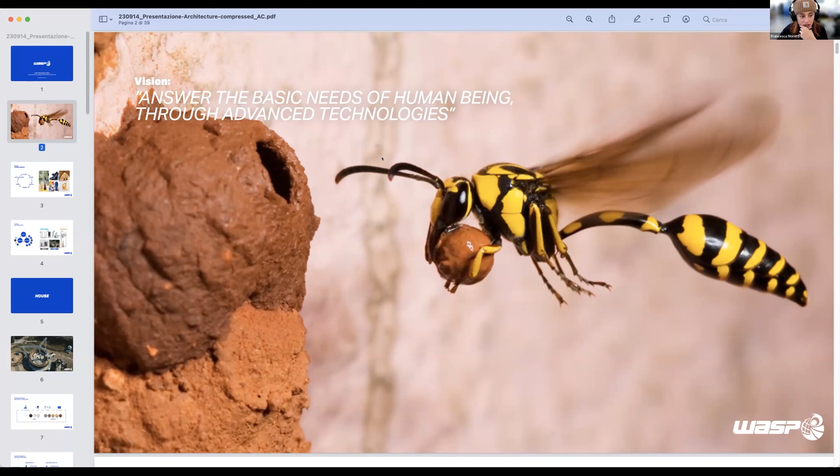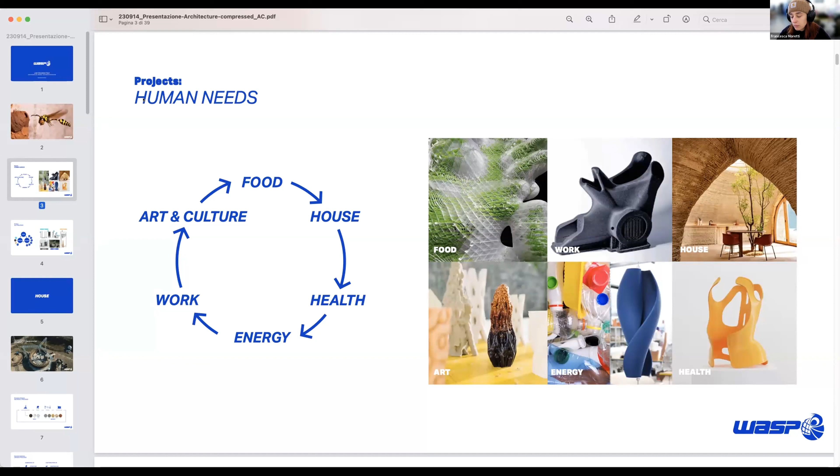We were really fascinated by the chance to connect additive manufacturing and real results that can work on human needs, like food, energy, art, house, or medical devices in general. We are designers, so we created machinery that can help us go in that direction.

In this presentation I will focus on clay and the house printer we created. This is the first case study we did, about 5 years ago. In the beginning our work was creating the machine that didn't exist before, and now we are facing the architectural topics.

So here is the first case where you can see the process: we took the earth directly from the ground, then we put it in the mixer - really common machinery in Italy - where we combine husk, raw fiber in general, clay, and sand together, and then put it into the pumping system to create a wall with already prepared insulation, empty space.

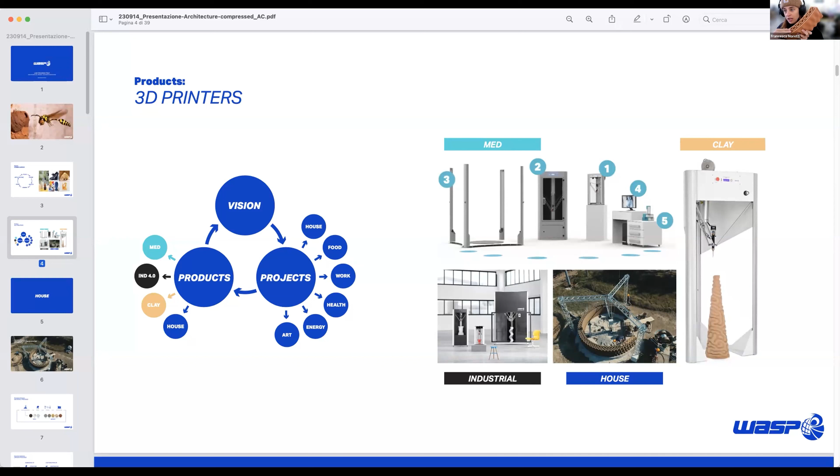We create with a smaller machine as a project in scale. So we usually work in a small scale, and then we scale up till the building size. This also helps a lot to understand the problems we can have scaling up the project.

In Gaia, we use local raw material like soil, but you can also put inside lime or cement and aggregates.

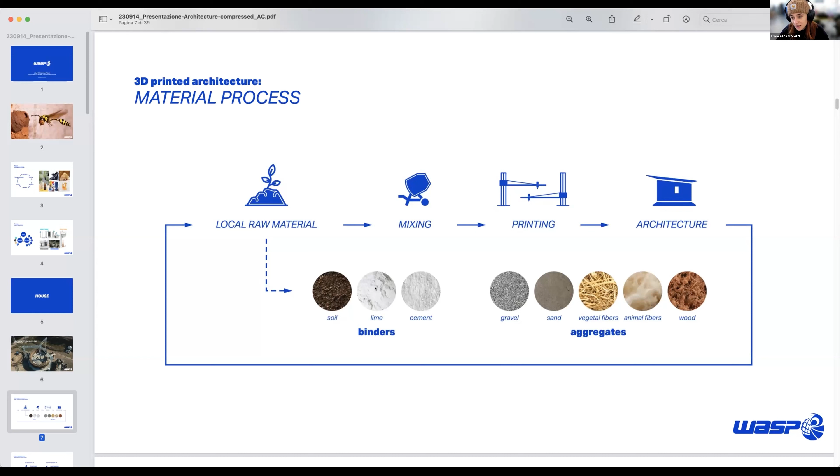The WASP project wants to put on the market structural walls in raw earth, but we have to manage with a different legal phase also here in Italy. So we are open to understanding how to do it properly, because it's a new application.

You can see online a lot of 3D printing in concrete, which is also a new way to construct, but we want to push the limit a bit further and work on natural materials.

So what we have in this wall is a chance to create insulation, also including the system.

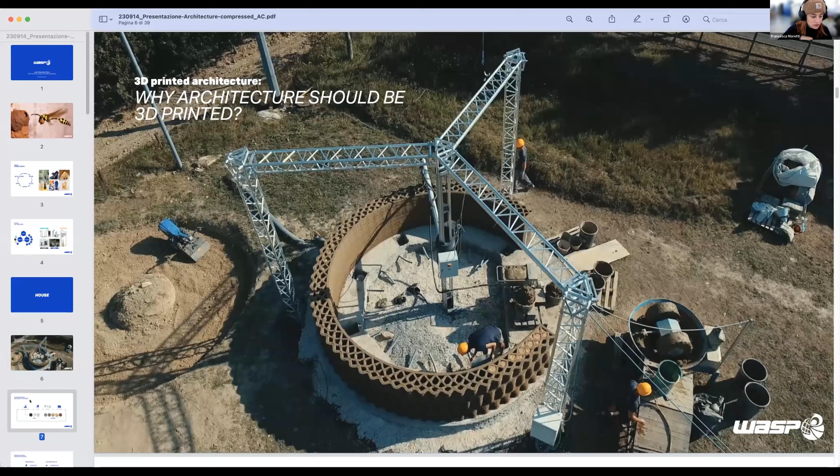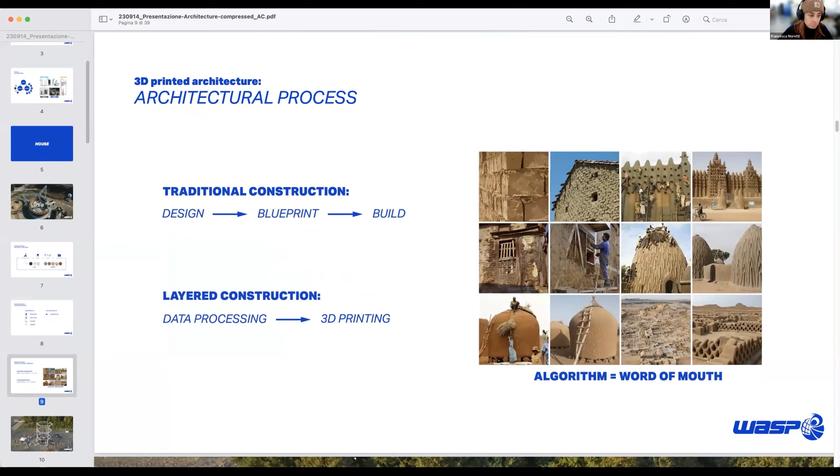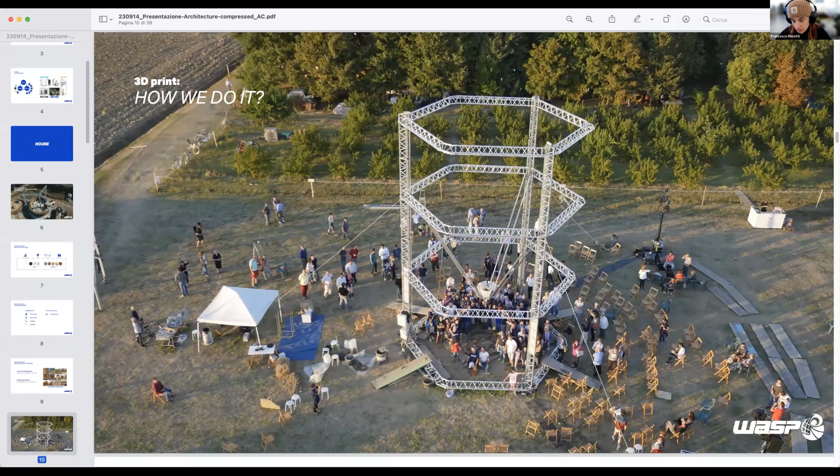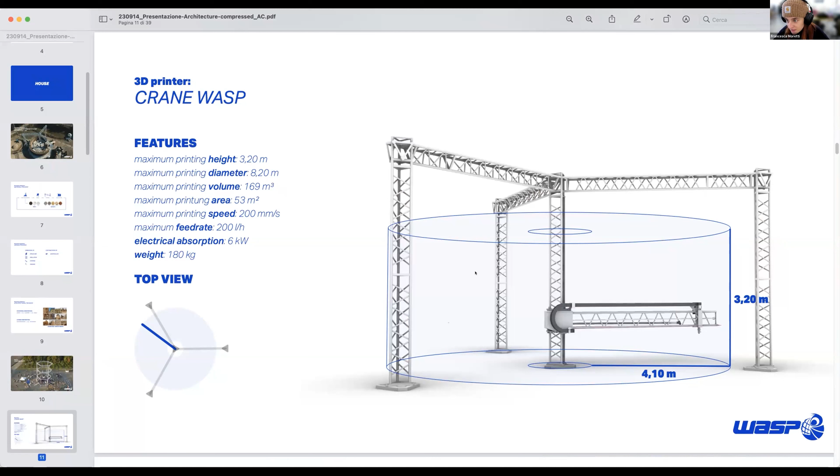This is the first printer we did in the past, which was one of the biggest in the world at that time. And now we have the Crane WASP with its optimized printer, with the biggest surface area for printing instead of this one. You have to imagine that at that time there was no previous experience in this technology.

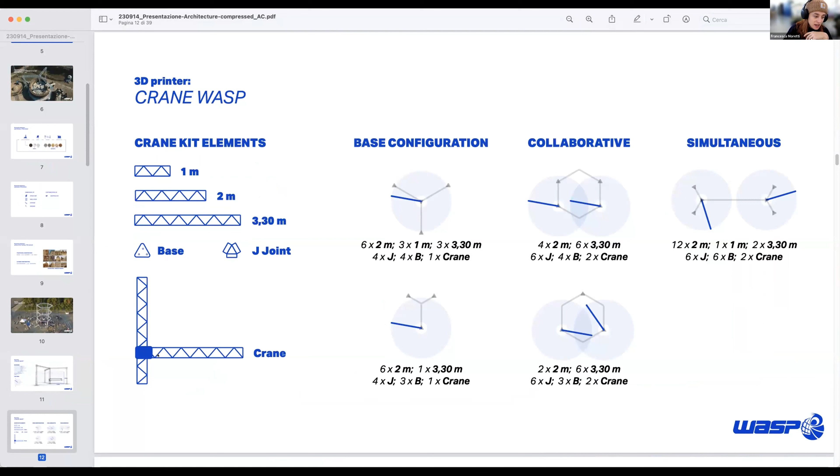And with this easy machine, we are creating a different setup. This machine can be mounted and disassembled with 3 people, and it's not heavy, so it's easy to move, because we were thinking to go also to places where it's not so easy to construct in a traditional way. So this could be the setup for us at the building site.

Where you can find the machinery, the earth taken by the place or already premixed raw earth, and all these steps that create the mixture to use with the printer.

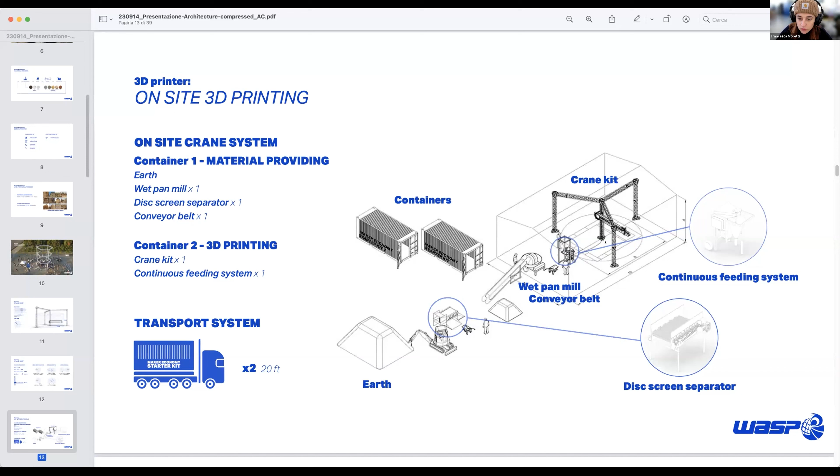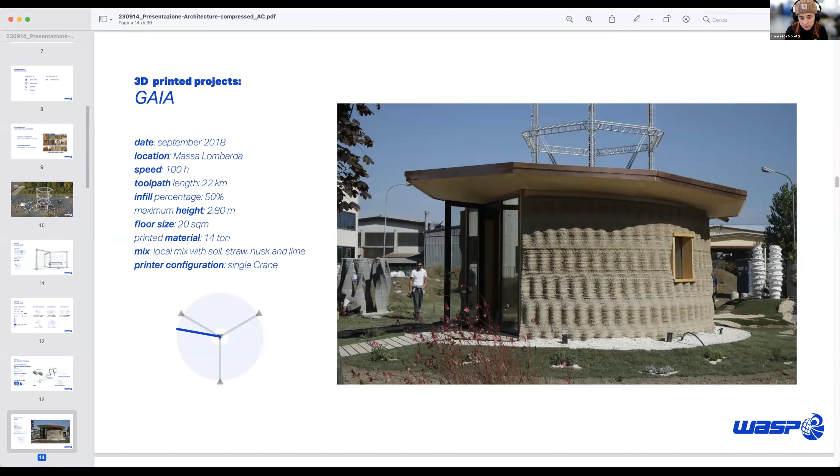This is our first case study at our headquarters. The name is Gaia, and it was the result of the previous building site I shared with you.

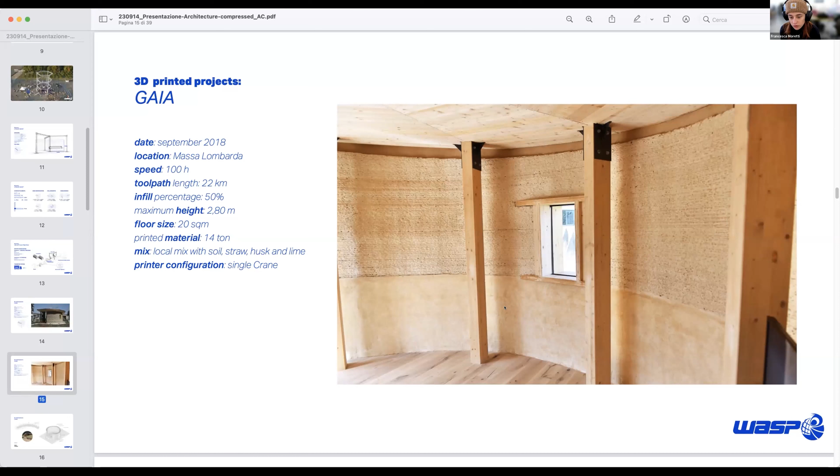This is the interior of Gaia, where we have the structural structure, and on this wood part we manually worked on the layer, also to show that you can cover, decorate, or add something on it.

We really spent a lot of time thinking about insulation, where we can use the empty space of the wall in the correct way, or what we can do with this technology. You have to imagine that we are mostly designers and engineers, not architects. So we faced in the past how this technology can put something new or different on the market or in the research.

So we put inside husk of rice for insulation, and the partner for this project was Rice House at that time.

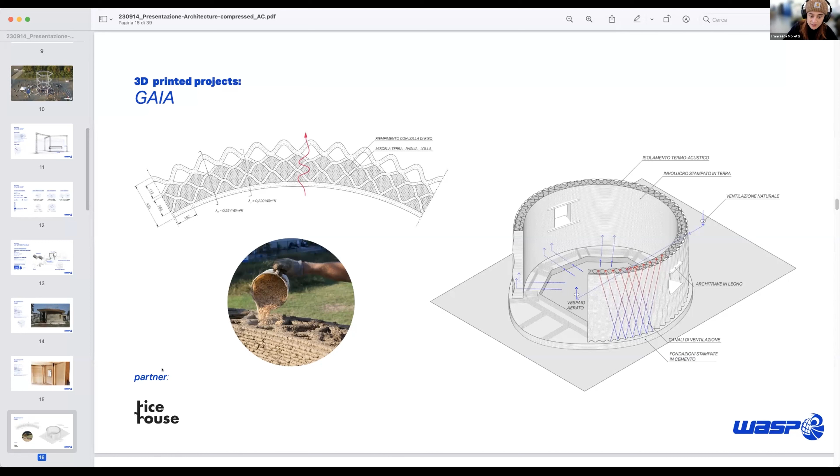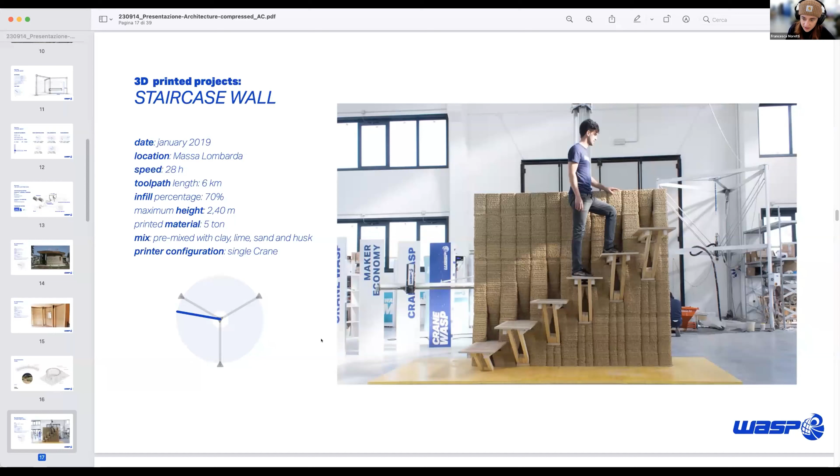We go on this kind of research because we want to imagine that we can put inside something printed wood parts or stairs, in that case. The partner was IAAC in Barcelona. They have one of our printers, and we collaborate on this research.

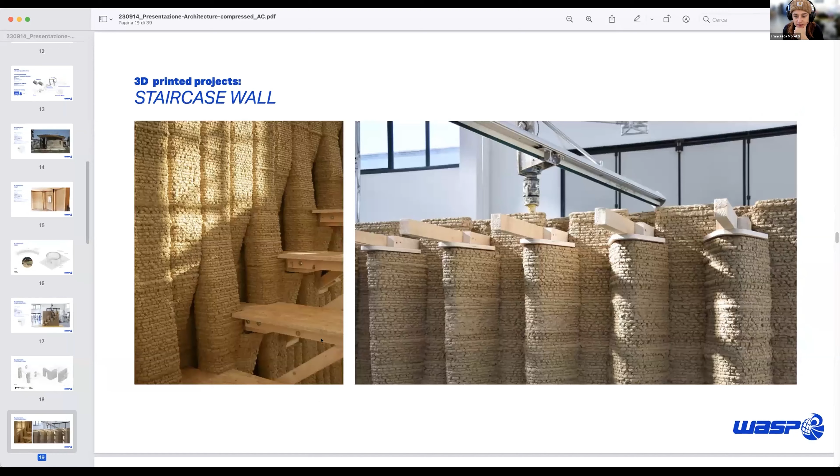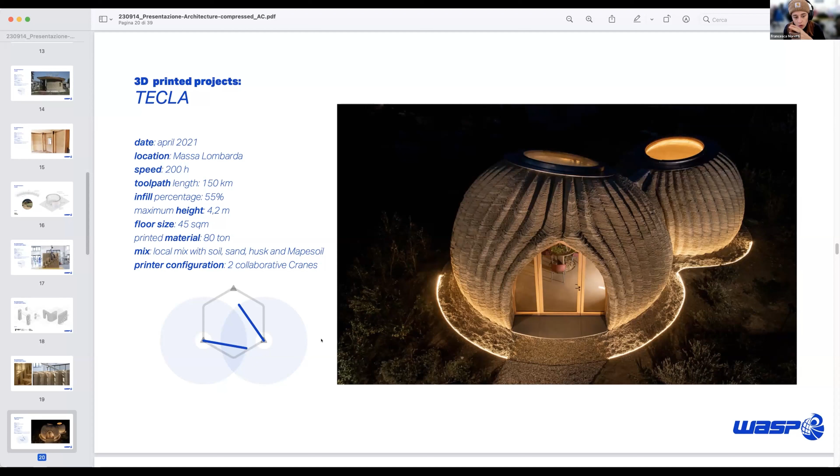This could be visually the final look and feel of the project. And here during the printing, then we step on Tecla. It was one of the biggest operas made in 3D printing with raw earth. It was really, really challenging because we pushed the limit of our printers, and also there were a lot of mistakes in terms of mix design, in my opinion, but we discovered later. Yes, I think we reached a point in the research with this opera, and we will step back for sure on the dome because it's a topic for 3D printing.

There was a lot of research on the internal wall to understand better how to use the technology at its best. The partner was Mapei and Milan Ingegneria. With Mapei, we thought about putting an ingredient inside, a low percentage of material that can help stabilize the raw earth. That was really challenging, and Milan Ingegneria was in charge of the structural calculation.

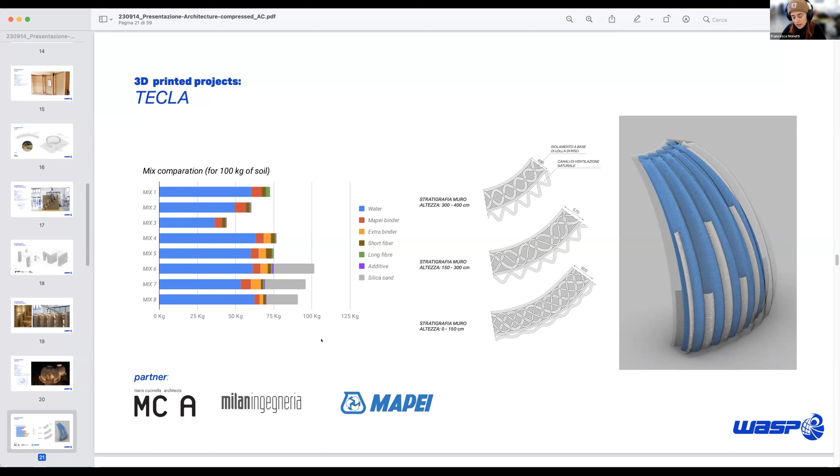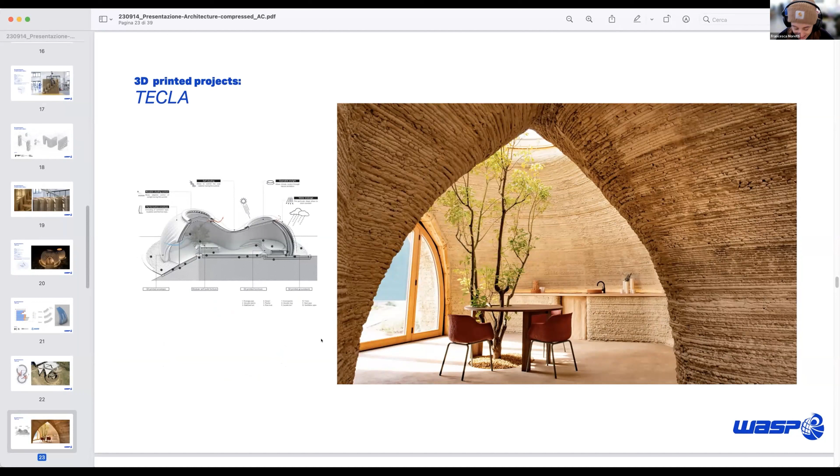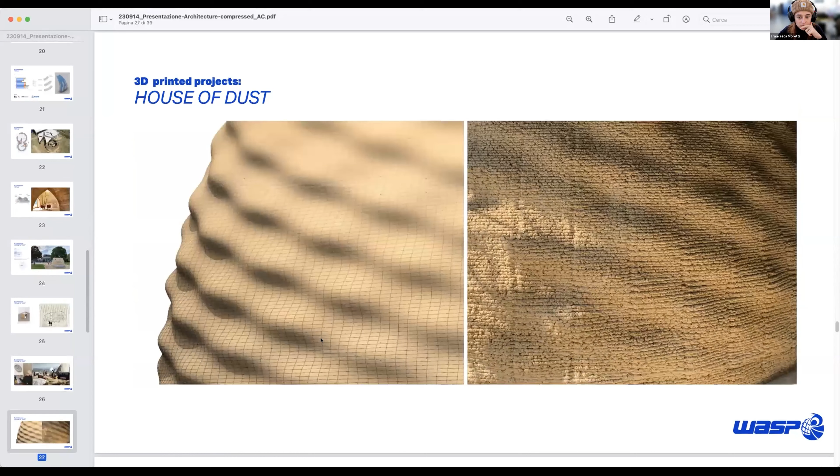As we have done in the past, we thought about an off-grid concept, not connected. This House of Dust is an opera. Maybe it's not okay, it's not interesting for you, but this one was and still is in a public space in Germany.

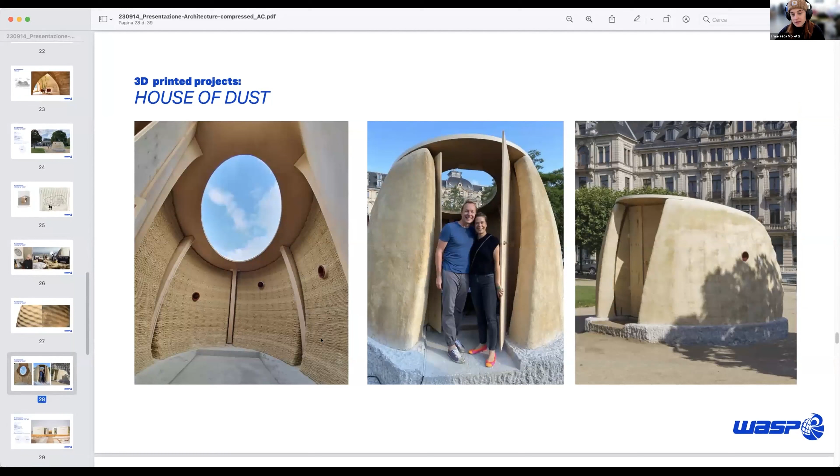So interesting for this kind of thing. And then we go to Dubai, two years ago more or less, where the challenge was to take the printer to the beach and work directly there, and really understand how to work with other people on the building site, because it was not an experiment of WASP, but exactly a shop, a pop-up.

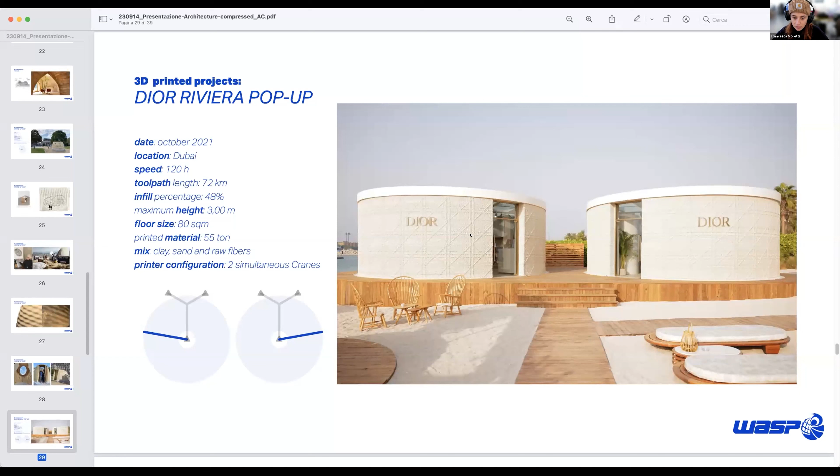So the mixture here was not earth. It was a lime-based mixture with clay, sand, and fiber inside. But it was not from the beach. It's upside down, but the interesting part is that with this instrument we can go easily in a way that's really not easy to reach by other printers or other ways to construct.

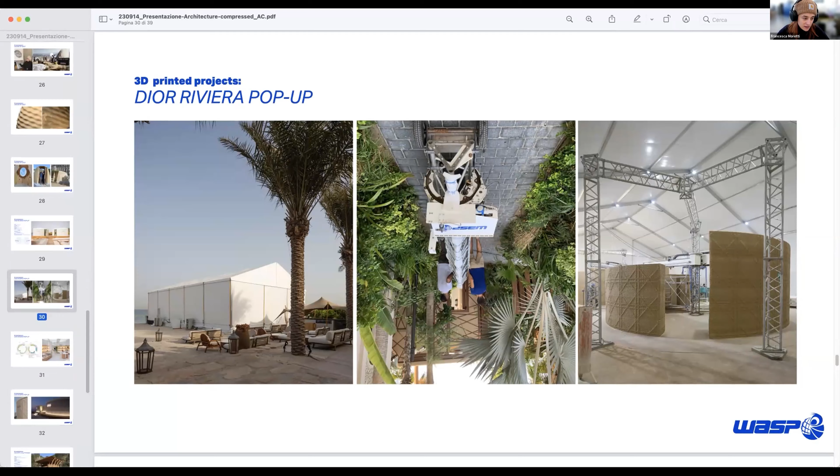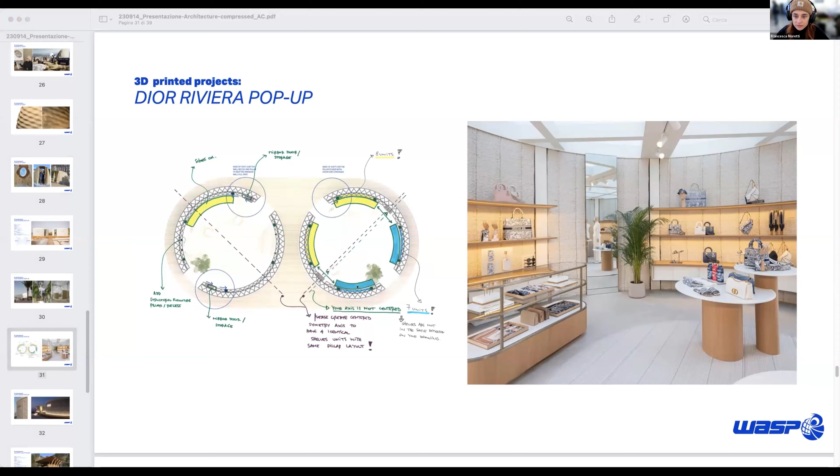The challenge was also the weather and the sea, really near to the building site. So we imagined inside this kind of approach where on the beam, on the structure, we also put like products or whatever. And this is the final look.

A challenge also, the big challenge for us, was this pattern on the wall. You have to imagine any layer is made with different movements. So we could not at that time make a mistake, because otherwise you can clearly see it on the wall.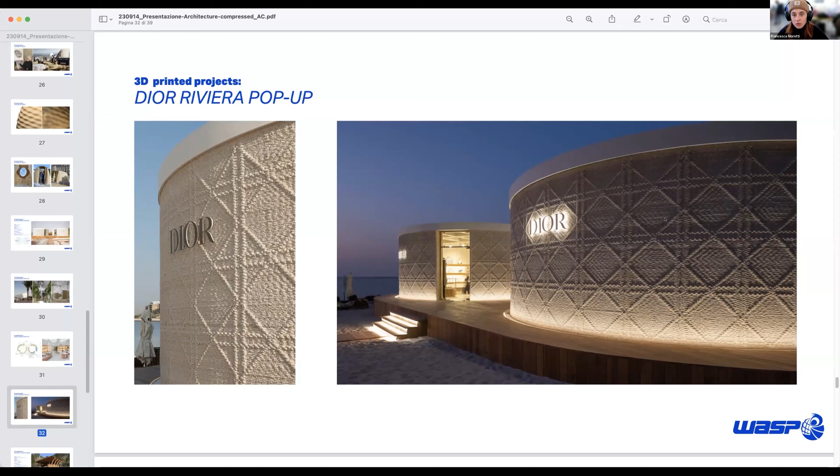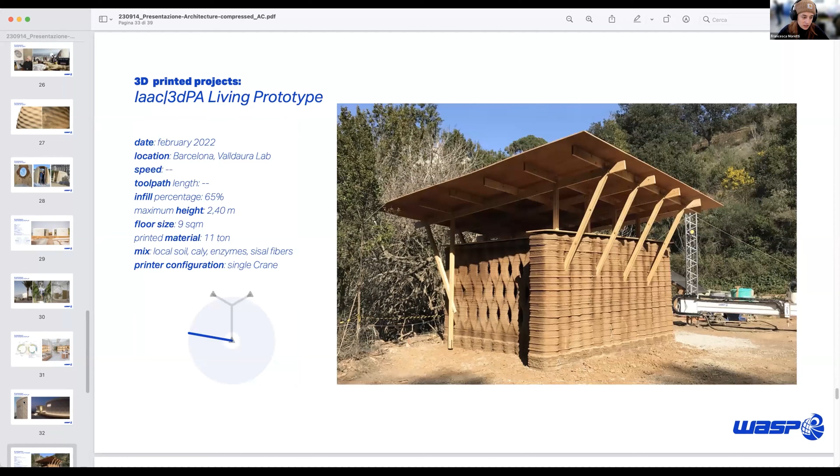And this is a collaboration with the IAAC, the first prototype they made in Barcelona with the local soil. And here during the building site. Here we are in Milan, in Triennale.

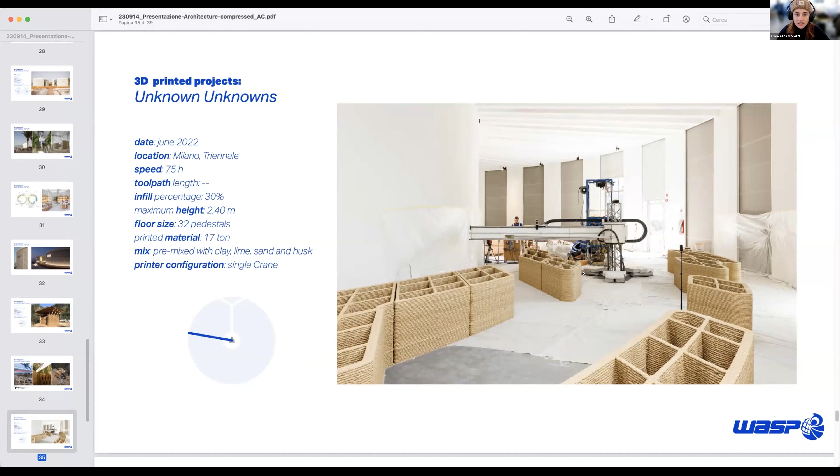This challenge was to put the machine inside. As you imagine, in an old building you have a maximum weight that can be supported, but the machine was okay. And parametrically, we printed different objects with the same machine.

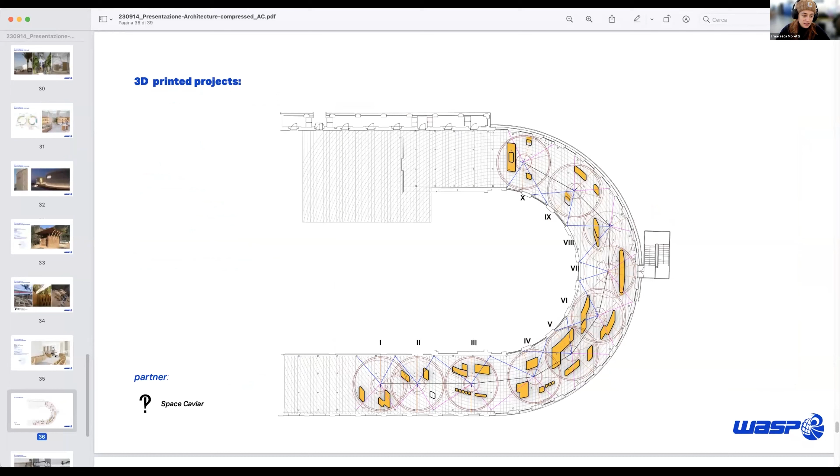The chance you have with the printers is that you can print the same material with different designs. This is the final look.

No, anyway, what we are doing now in Italy — we have a second company right now where we want to sell houses 3D printed in natural material. So WASP is focused on machines and research on the machine, but WASP 3D Build wants to really be on the market for that purpose. And we are now working on our own building, Ithaca, 30 kilometers from WASP, to show and prove that this kind of application could be done and created right now also in Europe, in Italy, because they do it with cement, with concrete in 3D printing, but there's no space right now for natural material. So we are the first team of people that want to achieve this big and challenging project. We started 10 years ago.